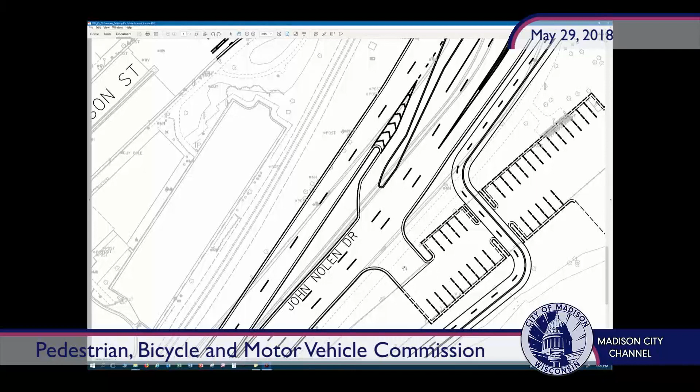The other major change to the intersection would be removing these two driveways with Machinery Row that enter into more or less the intersection, and replacing that with a new driveway entrance through the parking lot and over on John Nolen Drive, to get separation from all the intersection movements as well as the pedestrian and bike movements on the path.

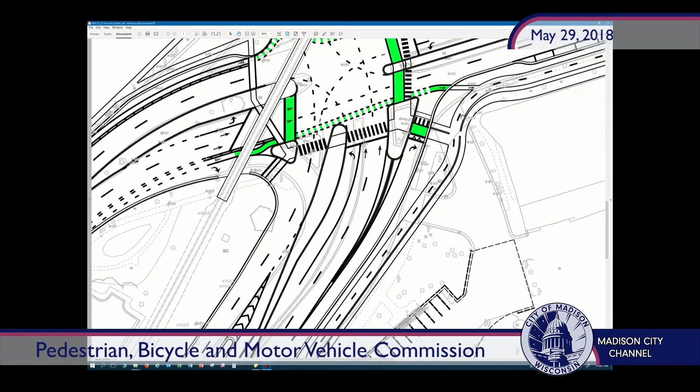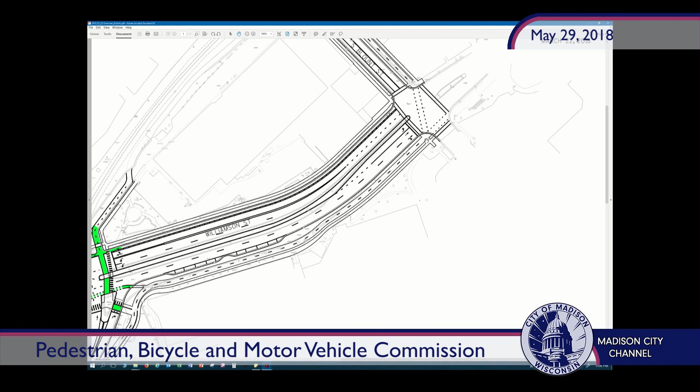For pedestrian and bike accommodations, we're proposing a new separated ped and bike path along the Cap City Trail and along Machinery Row, all the way to the Blount Street intersection, carrying those two different facilities separately, adding a new signal at the Blount Street intersection which would include a bike signal phase to cross, and continuing that new path system up to the Cap City Trail - all while keeping the existing Cap City Trail behind the Gateway Mall and on Wilson Street.

So those are the significant major changes to the intersection. Along the design process, in consideration with a railroad expert we hired to take a look at the intersection, one of the goals from the alders was to try to create a quiet zone at this intersection. We took a look at the proposed alternative with the railroad expert and came up with a couple other minor changes.

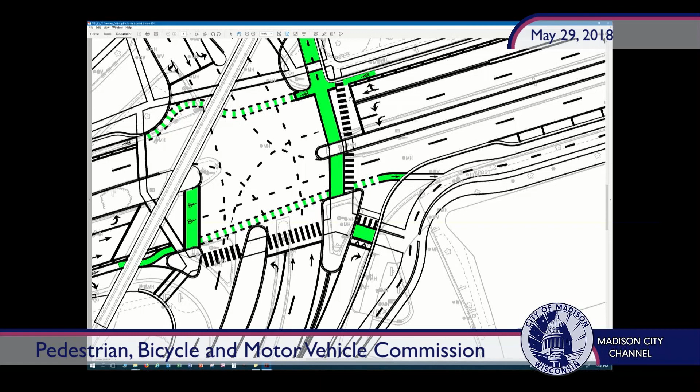One is the addition of a new island on the Blair Street section, which would allow us to place a gate and an arm that would block traffic coming southbound. Another change to the recommended alternative was switching this lane from a through-and-left to a left-only. What that would allow us to do is gate this through movement when a train comes by, and allow the two left-turn movements to continue.

So that's kind of the intersection in a nutshell. I think if we go through some of the Marquette Neighborhood points in their letter, that might help with some of the issues that still remain at large.

One of the items the Marquette Neighborhood Association brought to us was that they believe the design is based on data that's in favor of car movement rather than accurate data for all modes, pedestrian, bike, and motorized, and that the data for ped and bike accommodations was not included.

In the report we do have a section that shows the base conditions. We counted peds and bikes at that time with this study. There's certainly a lot of ped and bike movements, and that's why we've included as much accommodation as we could here. If you look at all the alternatives we took a look at, I would say this is probably the least car-centric of them.

There were a lot of alternatives that worked with a better level of service for motor vehicles, but we thought the ped and bike accommodations weren't as good with those, so we're recommending we move forward with the alternative that has the lower level of service for cars, but we believe can help with pedestrian and bike movement all through the intersection in all directions.

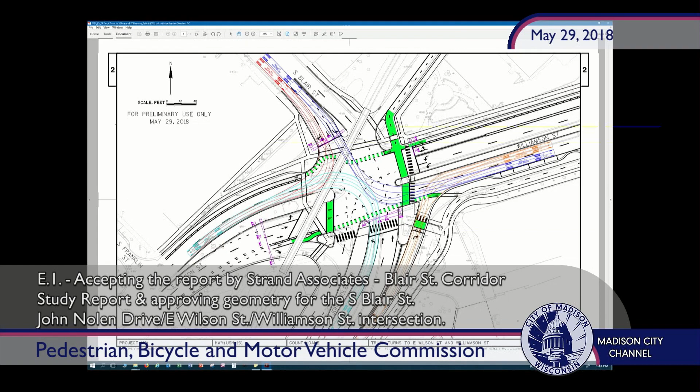In the past, we've had approvals of geometry with recommendations that we look into stuff too. So ultimately this project would come back, probably not to this committee, but the future committee that acts on its behalf, when we are approving the final plans and specs. That's happened just recently with East Johnson Street, where the geometry is approved with recommendations to look into something.

Generally, we're trying to get a handle on the big ticket items, because that sets curb grades, it sets where we do our storm sewer, it sets that kind of thing. Little items, like not having a big enough apron on some of these ramps — that's certainly stuff we can work on in the next few months, depending on which project we're looking at. So let me go to the overview.

So what we're hoping to do with this project is we have safety funds to basically cover the Blair Street and John Nolen portions. With safety funds comes lots of reporting, so it takes a little while for us to get all the approvals to get that federal funds established and get the project bid. We're anticipating this work, the Blair and John Nolen work, to be hopefully in construction in 2021, so we have until 2020 to approve those final plans and specs.

With the East Wilson leg and the Williamson leg, that pavement is in dire condition, and we are proposing in our budget for next year, if we can get the geometry approved, to go ahead and replace that pavement next year in anticipation of the intersection project. That would replace the pavement in this area just west of the railroad tracks, which is the absolute worst, and would also implement the Williamson legs here and the Blount cycle track.

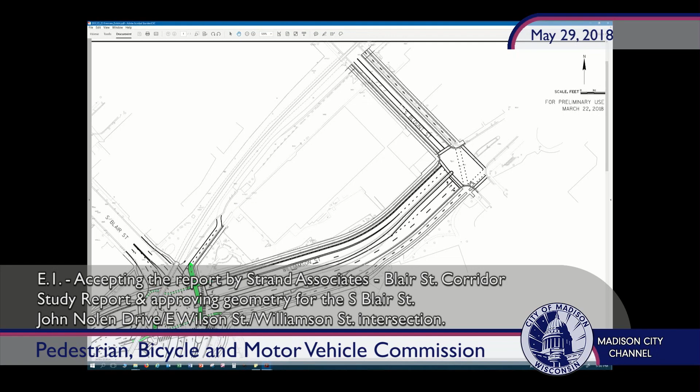One other small detail on this same section, where the Fauerbach pinches against the sidewalk there - right in that spot. I don't know if anything can be squeezed out of the median, or if we could get even another foot or two there, perhaps even considering some sort of retaining wall. Right now it's a really bad spot in the wintertime especially, but even just from rain events it always carries dirt and sand and pools up on the path there. So kind of taking a look at that.

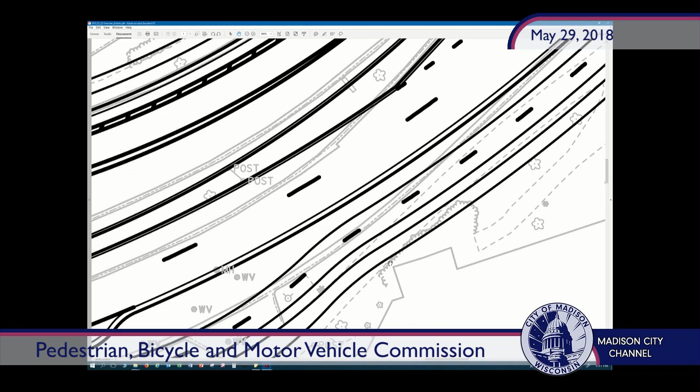Going back up more towards Blount and Jenifer, I know once you get past Blount it's sort of out of the project scope. But since it's a more constrained right-of-way there with the turn lane, it looks like you're maybe carrying the bike ped buffer the same width all the way out to that point. That might be a place worth widening that sidewalk again and shrinking the buffer a little, just to entice people walking that this is clearly the place to walk and they won't get buzzed by bikes.

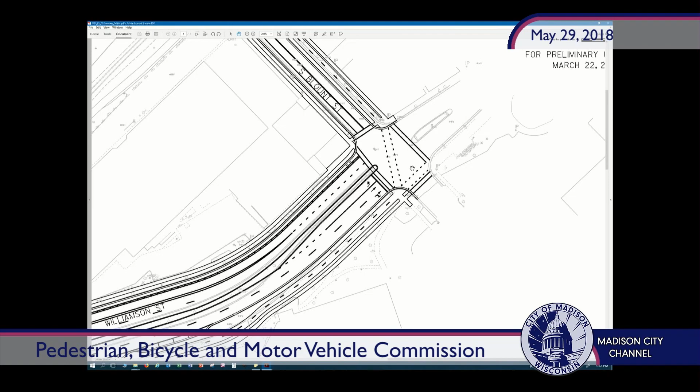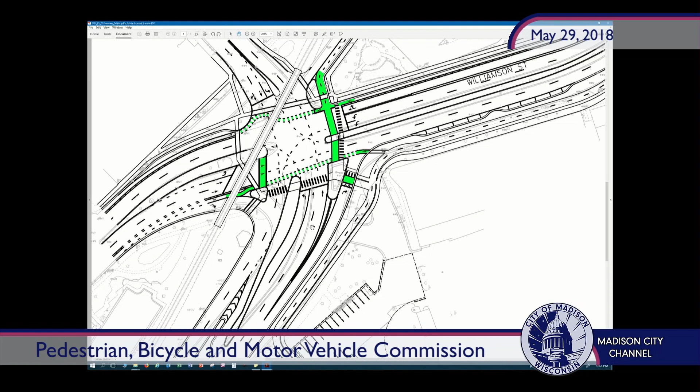In terms of that right turn, I know that's something the neighborhood's talked about a lot, and I get where they're coming from. I also understand the safety benefit of separating that, and I think the reality is if you take it out, even with volumes going down a little - say some people go to East Washington because they don't want to wait - you're still going to have more or less that same volume. People and drivers are going to get frustrated waiting through heavy ped crossings and they're going to take chances and push it. I don't think it's a good idea to take that separation out, so I'm in favor of leaving that.

I appreciate the intent to slow the curve a little bit, and I think raising that ped bike crossing should be a big improvement. So I think that's a really great idea as well.

I would say, and I think they mentioned this, but I'd really like to look at the timing between the green light preference for the ped bike movement across that lane versus the right turn green. I think there might be something we could do there, not in the geometry, but through that signal timing that might help the neighborhood - just to help control that throughput a little bit, almost like an on-ramp effect, but mostly to help prioritize the bike and ped crossing since it's a pretty big journey going across all those legs.

One small thing on the eastbound Wilson - if we could get a bike call button on the left turn lane island as well. Right now there's one there, but we need one because if you're going down and want to take a left, you have to go to the right, go over, hit that, and then cross across the front of all the cars to get in. I think that island is too small - you have to stay away from that actual crossing. One of the reasons we jogged this sidewalk over is that we had to get the call button far enough away from the railroad.

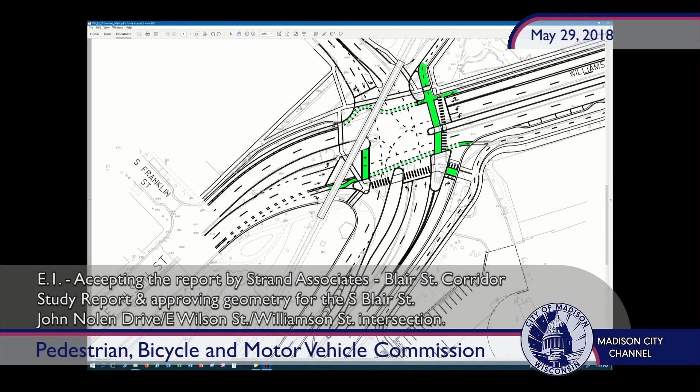Maybe it could be over here instead - I think that would work fine, because if it's a red light you could pull up, hit it, and then if you want to cross the tracks, waiting is fine. But the issue is it just doesn't work well - you hit it, and as you're starting to go across the bike box to get in the left lane, if it turns green, you're in a really bad spot. So being able to activate it, or putting in an in-ground activator that works so you don't even have to push a button, would be great as well.

But something to sort of eliminate that issue. Actually, we're trying to do more and more detection for pedestrians and bicyclists. We are experimenting with a couple of different technologies, mainly through regular cameras and also infrared cameras, to detect pedestrians and bicycles over here.

So we're doing that for bicycles right now. It's much more reliable than the in-pavement loop detectors we had before, but still we found that sometimes it's missing the call. We're actively looking for new products, and industries are getting the message, they're working on it as well. In between, we can probably look at adding a push button over there if there's enough space, but for a long-term solution, I think the city is trying to do more and more detection for bicyclists.

Great, just two other quick comments. One is -- where is it? Oh, the Law Park. So my understanding is that the parks department is going to do some master planning there, and you want the question of that design to fall as part of that, which makes sense to me.

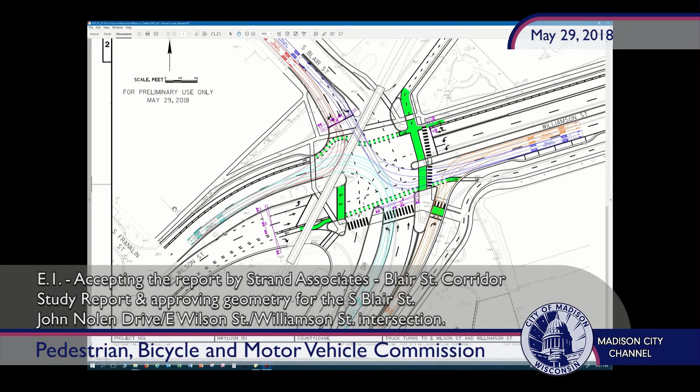I guess just one thought in response to that, and I don't want to get into a big brawl over this. It's a 2-block section. Two things I think we need to challenge ourselves on. One is the idea that bigger, wider concrete is more flexible, and I think it is true in terms of motor vehicle movement—it opens up more possibilities, and as things change you can restripe things. So I get the concept. But for people walking, biking, taking buses and getting off and walking, big wide stretches of concrete primarily used for cars—it's not a flexible situation.

It's a barrier. So I think we need to challenge ourselves on that front—just building a lane that we don't have a really compelling reason for. That extra 10 feet of terrace space would be really welcome in this stretch. It's kind of a concrete jungle there. So I think we just have to push hard there.

And then this other idea of preparing for potential future growth, particularly downtown. I feel like we get that we're not going to be able to accommodate all that growth with motor vehicles moving people around, and I feel like we're pretty committed as a city to focus on transit, biking, and walking, and that's where we need to put that focus. So if we're going to talk about growth, keeping an extra car lane just in case more people want to start driving doesn't feel like a good way to do it. Instead, making these streets attractive to people to be outside their cars is a better strategy if we're focused on growth. So I'll leave my comments there.

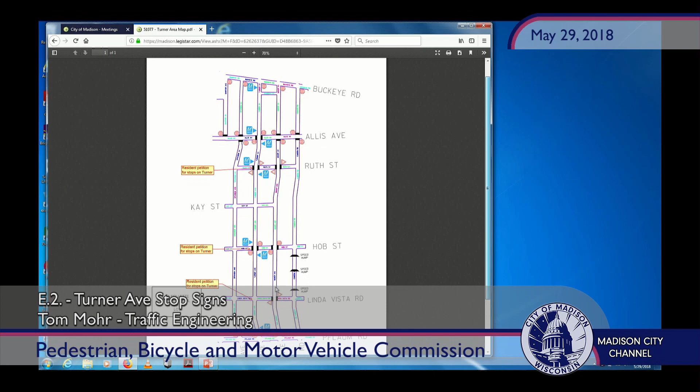So the question is, where do we want to install stop signs along Turner? I think there is a problem around Linda Vista, and it seemed like that was the residents' primary concern. Their biggest concern was that area. So I think it does make sense to do something in that area.

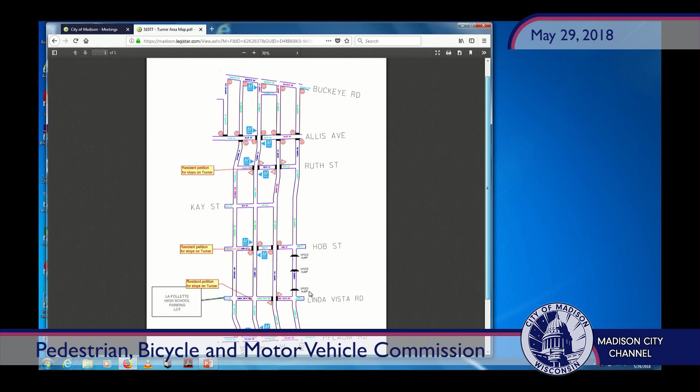One of the issues is that there is very little side street volume, so anytime you add stop signs where people feel they're not needed, that could lead to people running the stop signs. So adding 3 stop signs on Turner is probably not a good idea to do right away all at once, because you also have to look at the parallel streets.

The only stops are up here at Allis. So if we add stop signs on Turner, that's most likely going to lead to traffic using a parallel street and just pushing the problem around.

So that's pretty much the background. I don't know, I could leave it at that.

Yeah, I should have added that, we performed all-way stop studies. Really, none of the intersections met the warrant.

Oh, I forgot to mention the crash history. There have only been 2 crashes on Turner in the past 5 years that were police reported, and those were both at Linda Vista. It looked like they were both due to it being an uncontrolled intersection and drivers just not yielding.

We have a few accompanying maps, one being bicycle facilities, the other being Tier 1 sidewalks, with definitions in the plan. These were essentially pulled from the Madison in Motion Transportation Master Plan, since these are substantial strategies and actions within the comprehensive plan as well.

We have some additional strategies and actions relating to this committee's purview, one being to ensure all populations benefit from the city's transportation investments. This is an acknowledgement that sometimes that engagement...

Actions as a result of that engagement sometimes focus on neighborhoods that are able to speak up the most, or are most familiar with the city's methods for engagement or soliciting feedback on projects. So I want to try to be more proactive in the future about proposing things for neighborhoods and areas that might not be as familiar with the ways to reach out and engage city staff and alders, the way that happens right now.

Another strategy, under neighborhoods and housing, is to create complete neighborhoods across the city where residents have access to transportation options and resources needed for daily living. The action most relevant for this committee's purposes is to ensure that existing and future neighborhoods are well served by transit routes, shared use paths, and sidewalks.

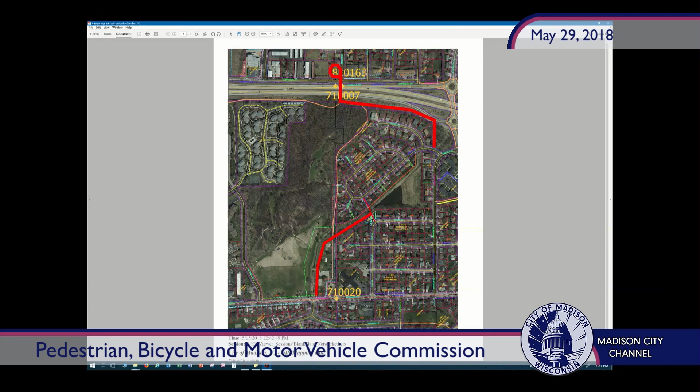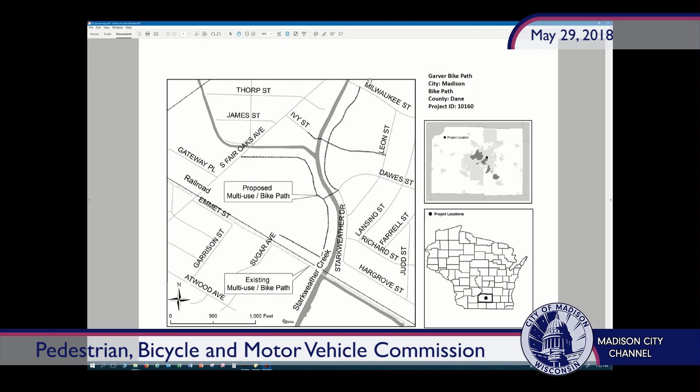If you look at our previous map, Dawes Street ties into this new bridge crossing. So if you wanted to head up along Milwaukee Street, along Starkweather Creek, you can go this way. And if you wanted to head further east, you can use Dawes, the bridge, Portland Parkway, and this new proposed path, the Autumn Ridge Path. That's the idea -- we're branching out what used to be called the Goodman Path into different neighborhoods.

Okay. Next one is the Old Middleton Underpass. Here's Old Middleton Road, just off screen to the east is Whitney Way, and there's the new University Row development here. Right now there's an actual underpass under here accessible through a stairway in the Kanakis Supermarket parking lot. It's pretty unpleasant.

I never knew about that one. Yeah, it actually does get used. It's a little old stone arch built with the original railroad for stormwater drainage. People use it to walk through. It's about 5 feet tall or so. The railroad wants to fill that in, and for structural reasons, we're proposing an alternative.

We do think it's a pretty good connection, especially from University Row. We have a new path installed with that development along the western limits of that plat. So we'd look to create a new crossing on the other side of the Kanakis Supermarket, tying in with Old Middleton Road, Craig Avenue, and this new path built in University Row. It would be a new ped bike underpass underneath the railroad.

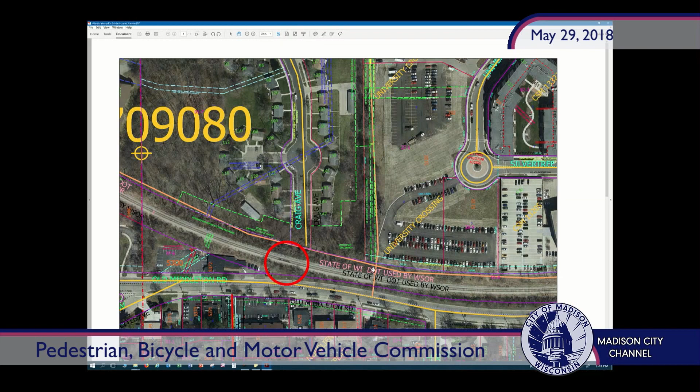Would you be looking at a precast box for quick construction? Yes, definitely -- for these next two, that would have to be the approach, to try to minimize the railroad disruption and keep down the costs, like on the Wingra path. Okay. The last one is Troy Drive.

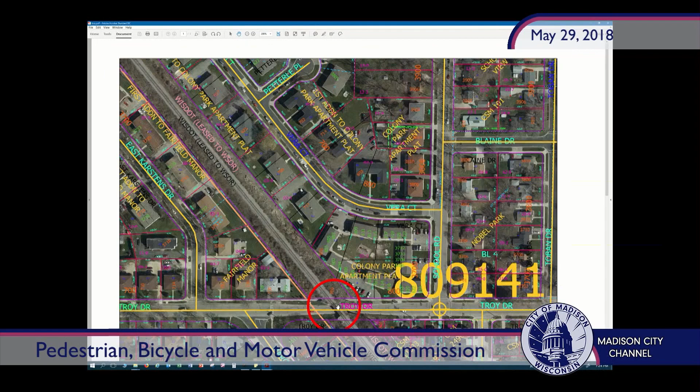Alder Kemble is very aware of this one. Same situation -- we've got a railroad crossing here, with an old corrugated metal pipe culvert installed that people walk through along the north sidewalk of Troy Drive. It's pretty dark, pretty damp, doesn't drain very well. Not very inviting for a stroll through.

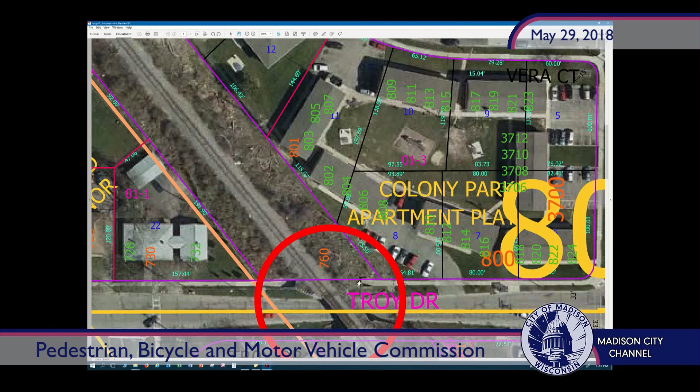But what we're hoping to do is design a new ped bike underpass, a more standard width, standard height precast box that we could install hopefully in a few days, trying to minimize railroad disruption. So these are four different RFPs we're proposing to issue in the next month, and get started on those projects.

Is the last one just the pedestrian one -- it wouldn't change the road culvert at all? Yeah, that's a good question. That's substandard as well. However, the cost of that railroad bridge is pretty substantial, and we've pressed WisDOT to take a look at that.

They're basically only focusing on bridges that are structurally unstable, which this is not. We've also in the past applied for federal STP urban funds to try to replace that bridge. It didn't score well at all, so we weren't very successful in that effort. So our next thought was, let's at least get the ped bike crossing fixed.

Hopefully we can apply for TAP funds if we get this RFP going, get the design going, and have a good handle on the costs and the design. We could either choose to do it with city funds or apply for federal TAP funds.

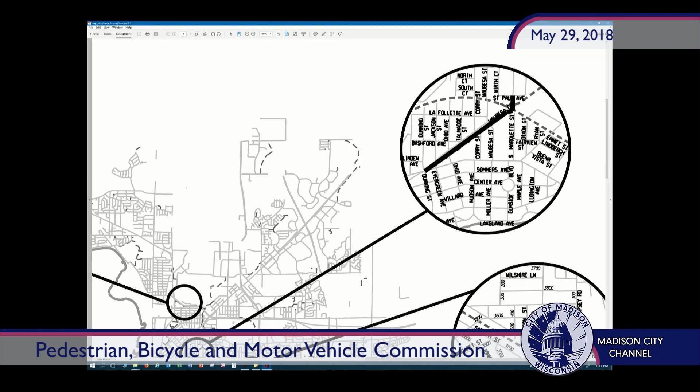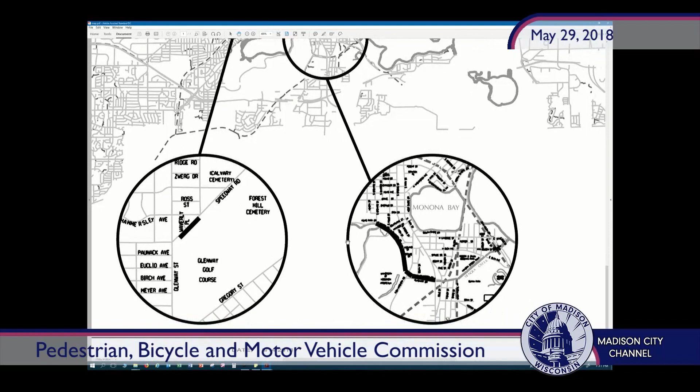Good, and the Wingra Creek path? Yep, it's this one, so we got Orchard to South Park—it's kind of hard to zoom in here, but this stretch. And then Olin Turville Court to Sayle Street, so through here.

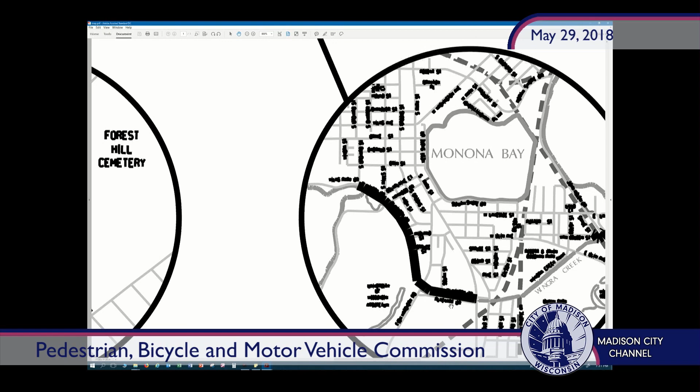It must be further east. So these two segments—maybe this? These two segments are probably in the signature bike routes that we're working on right now.

Yeah, so there might be some other improvements come online as well, like intersection improvements that we're working on with engineering for that whole signature bike route project. Oh good, yeah, I don't know exactly—that's by Van Dusen and stuff.

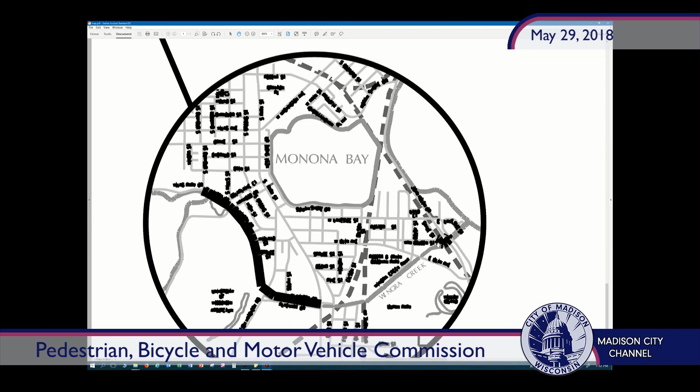Yeah, and I think I mentioned this to Chris, but the current alignment doesn't actually follow Wingra Creek as the primary path—it sort of goes this way and then cuts back. I don't know if it'll be reconsidered before it's constructed, but I think realigning it to go along the creek would make more sense. It's also kind of a blind corner because you're going underneath the railroad culvert there, and it comes off to the right before it needs to. So it looks like there's a pretty good opportunity to straighten out the Wingra Creek path and fix that little jog where it goes over to the side street.

So maybe taking a look at that. And then the last comment I had was for the Glenway path. I don't know if it's... that one's a little short segment along just Speedway, that bit there? Yep, okay.

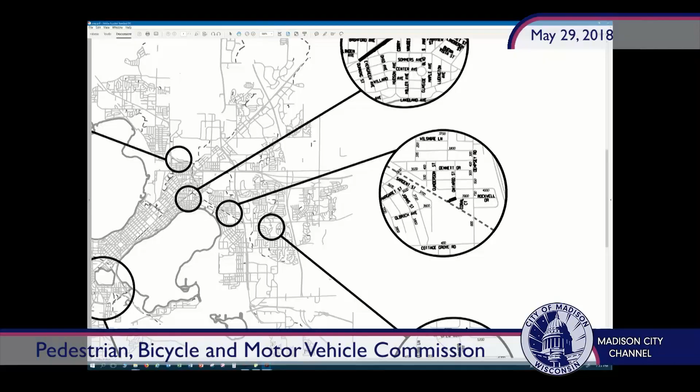Could you go back to the capital city one there? I heard you say Jackson to Marquette. What was the other one? Oh, it was that little spur, St. Paul, the spur here. Oh yeah, so that Jackson to Marquette, and then this little spur. That was originally planned to be part of another project, which never happened.

Correct. A couple comments on that: path width, Jackson to Marquette, long-term should be 12 feet. It's 10 feet right now. This would only resurface, so it's not. Well, I'm wondering if you're wasting your money, especially at Ohio Street, which I believe, unless they pulled out of the program, is programmed to be redone with a tabletop crossing.

Unless Rob took it out of the program. Where? Ohio Street. Ohio Street was supposed to be redone with a tabletop for a bike path. I was going to ask Rob if it's still in the program. He'd put that in along with the Brearly crossing. I'll have to check on that. I'll have to check on it too. I've been meaning to ask them if they're still in.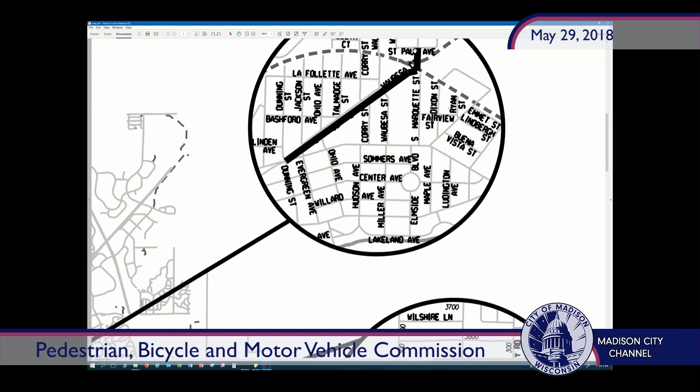Yeah, I was actually curious about that as well. The plan calls for a number of tabletops through that stretch, so it would be good to know if there's any opportunity, especially with it being closed to - I think Ohio was the one that was sort of first on the list. The other thing though is...

Up by Marquette, this will include the little bit where there's the driveway coming from Kip. If we can make sure that - because right now it's sort of like that was built into the path, so the concrete Kip path is sort of priority over, and it actually creates some weird water drainage issues there. I think this will basically hit right where that corner is, so making sure the path has a smooth grade, and fixing that stormwater issue right at that corner would be really important, because that whole thing kind of floods in big rain events.

Any other questions? Great, thanks Chris, for the update. Do we need a resolution on that? We do not, this is just informational. Okay, just wanted to make sure. Okay, thanks very much.

Next, we have reports of committees and commissions. Plan Commission, I'll pass on that. Long range?

It'll happen on Thursday, and Oliver Whitmore's not here, but we're dealing with the issue of connectivity between streets in his neighborhood. Okay, thank you. I should go back to Plan Commission. We had the issue on Segoe between Sheboygan and University, and the issue of ensuring that bike lanes are going to be put in, and that even came up at council, but Plan Commission initiated that, and it carried through in a positive manner, I think. I believe it's going to happen.